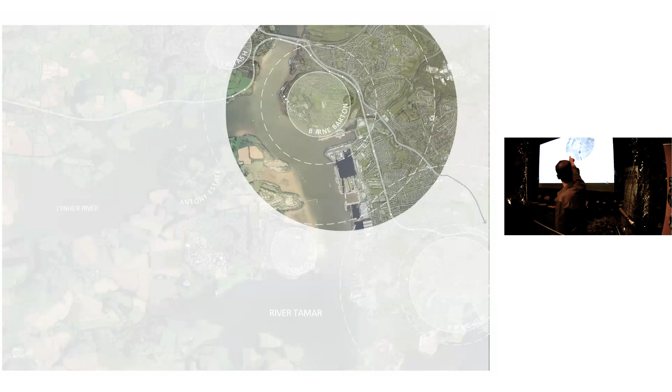As you can see from the map, it's a bit skewed, but it's 5 kilometres from the city centre where we are now. And actually, I haven't got a point to it, but we actually went on the boat last night. You can see, just for your reference, the Tamar Bridge, the Brunel Bridge at the top there.

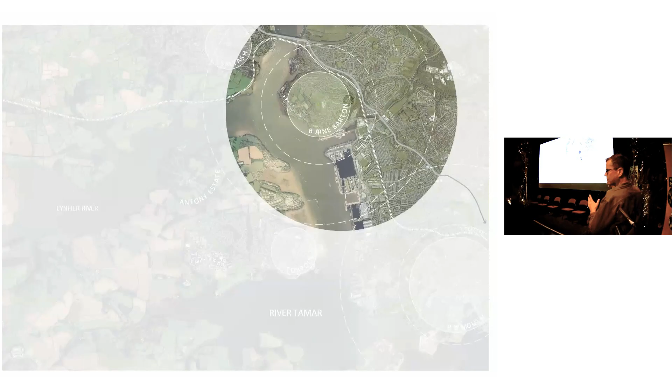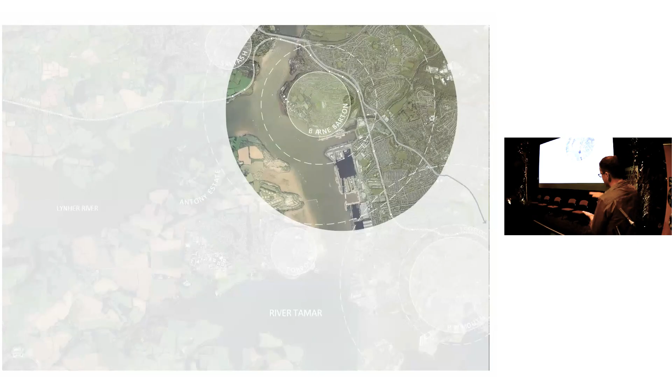So known locally as the island, it's surrounded by the dockyard to the south, the Tamar Estuary along the west, and then to the north and east is the railway line and road. So it's only accessible by one route, one road under a bridge, so it does feel very disconnected from the rest of the city and quite an isolated community.

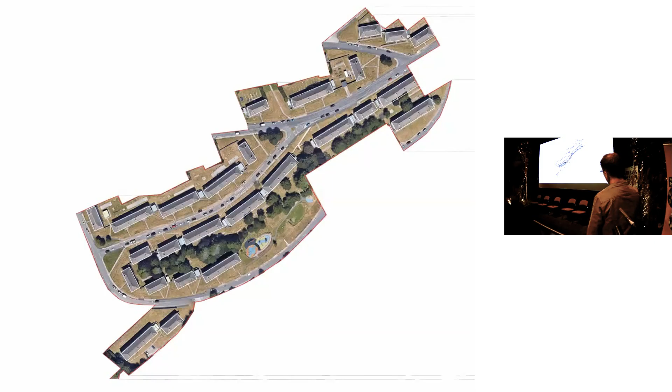One of the main challenges, as Paul was mentioning, was the topography of the site. There's 28 metres of level change from the top to the bottom, so it was great fun working out the levels on that one. As you can see, all the blocks are either set up or down from the roads, so many problems with accessibility, and some of the gradients are as steep as 1 in 4 across the site. That was quite challenging to work with.

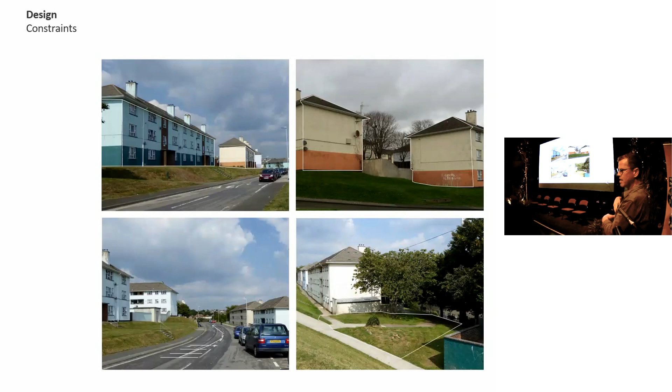As I was mentioning, each block is exactly the same, so it's quite hard to orientate yourself when you're moving around the site. There were no windows on gable ends, so it's not really good for natural surveillance, and there were lots of leftover parcels of land, and generally an unkempt estate, which had knock-on effects in terms of Secured by Design.

We chatted at a lot of consultation events, and families said they were scared to leave their flats at night because all this area in between the blocks had no natural surveillance at all, was heavily wooded, and had no definition between public and private, with a lot of associated issues.

Another thing that happened during the course of our project work down there was construction of the energy from waste building, which, being such a large building on your doorstep, had really big visual impacts, with the smoke and everything. That had some quite negative connotations as well for the local residents.

But it's not all bad. As Paul touched upon, the local community has been so strong throughout the whole process. We did 8 consultation events, and we had a newsletter, an arts project, and websites. But one of the best things is the resident steering group, set up in 2017, which has met every month since, giving over 800 hours to this project.

And the first residents are moving back in December. Out of the original cohort of 20 families, we've decanted into phase 2, which is still standing, and a lot of them are moving back in December. That's one of the really strong things we'd like to tell you about this project.

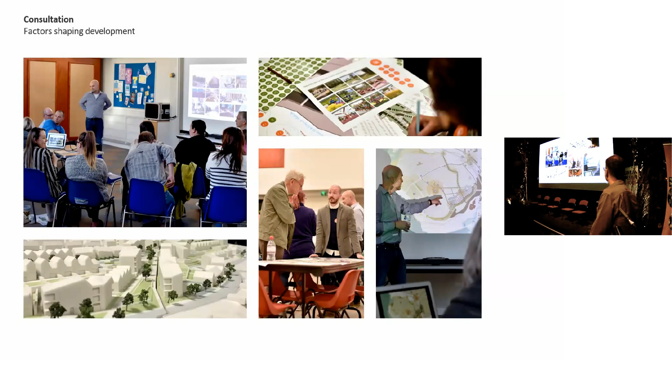The other thing is the River Tamar. I'm a little biased because I grew up a little upstream from there, but I don't know if you saw it on the boat trip yesterday, how beautiful it was. If you were walking around Barton, you wouldn't know it was there. We felt this is one of the most amazing rivers in the country, and bringing something of this quality into the site was our big opportunity.

As we touched on earlier, there's 228 two-bedroom apartments. What we're proposing is a mix of 2 and 3 bedroom homes and 1 and 2 bedroom apartments, so people can stay within the neighbourhood throughout their lives, upsizing and downsizing as they need.

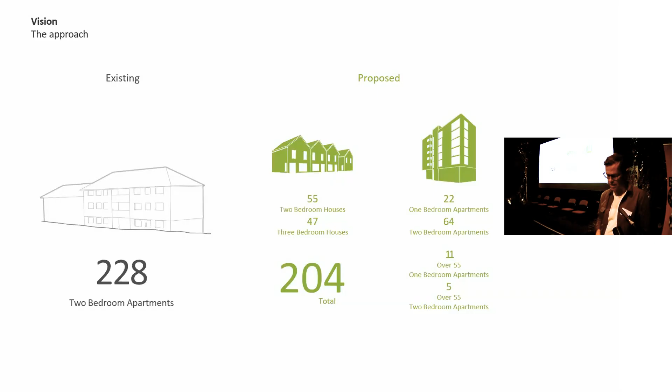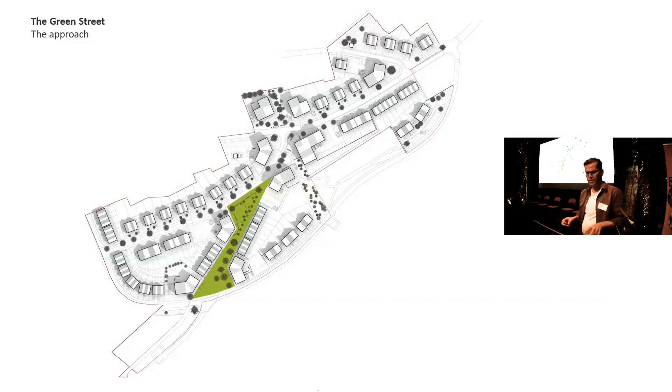From the existing condition, one big move was a green street. That reorientated the whole site away from the energy from waste building towards the River Tamar, trying to bring some of that beauty and quality into the heart of the site. It also cut across those levels, so from very steep streets we've now got a gentle gradient up to the heart of the site, reducing health inequalities for people who live there.

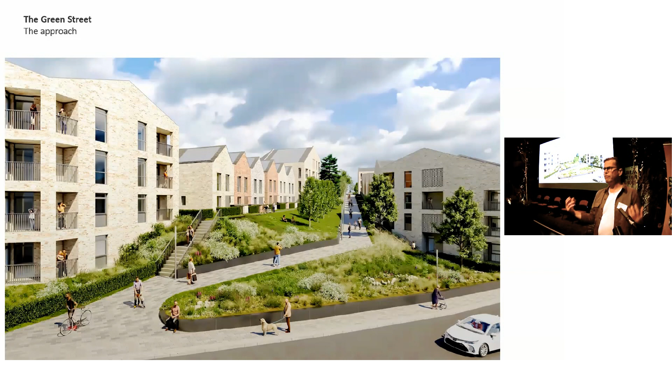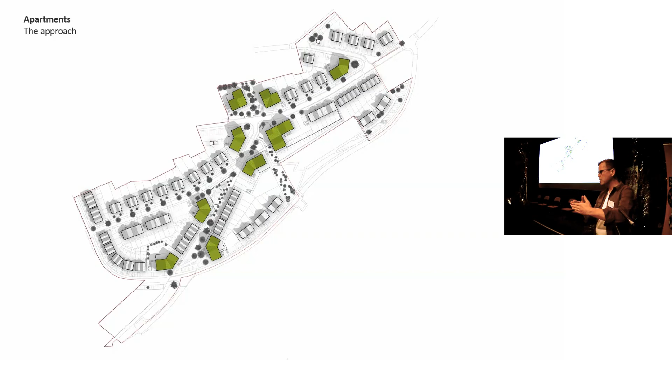Along the Green Street we've got lots of active frontage, a range of housing types, a lot of planting, rain gardens, informal play, and a focus for this new community. On the corners, to deal with the gradients as you go from one level to the next at 90 degrees, we use apartment blocks, giving a real focus and enclosure to those key nodes throughout the site.

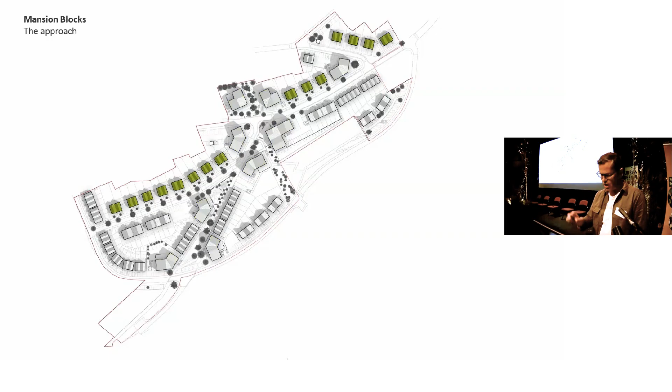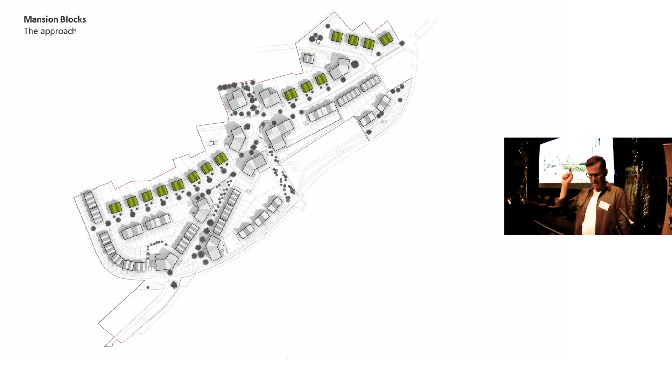Our next big move was mansion blocks. These worked well — there's a big level change from back to front, over 3 metres. They take up that change in level, providing an apartment on the ground floor and 2 houses above. These have proved popular with Clarion and residents because of multi-generational living — grandparents taking the flat downstairs and families above. They get a nice front garden for the apartment and big back gardens with amazing views out across to the Tamar.

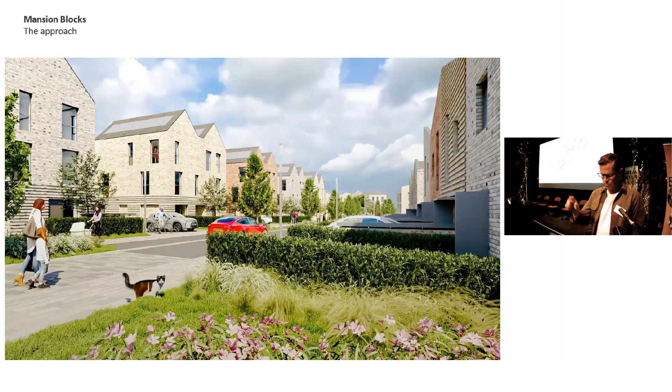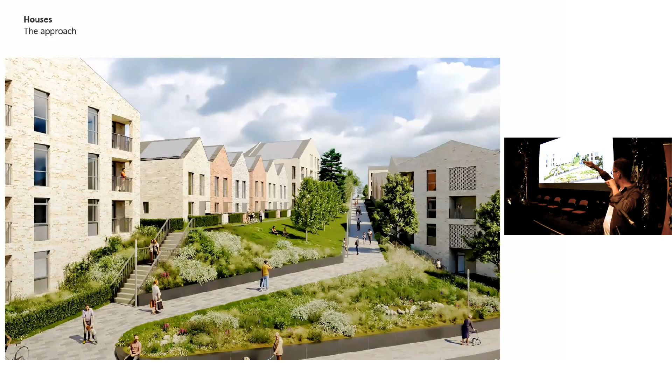We've infilled those streets with houses, ranging 2 and 3 bed houses, mainly terraces. The gable ends give that animation along the street, and they step up as you move up the green street to get that nice active street scene.

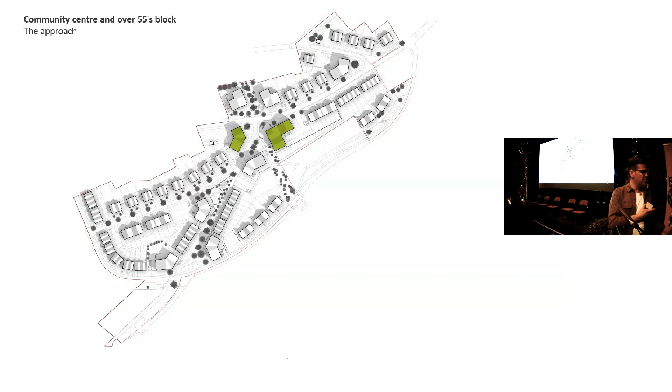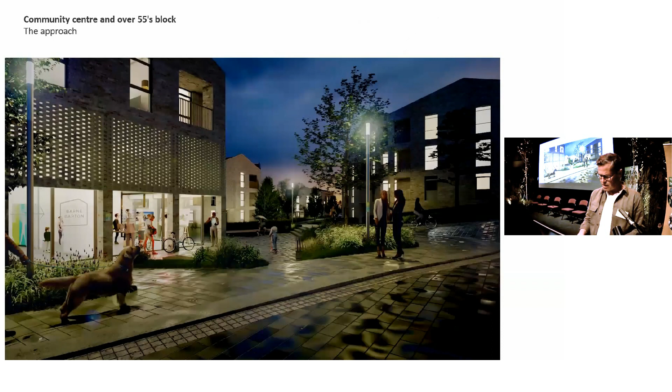At the central square we've placed the community centre, giving Clarion a permanent presence on site for events and ongoing consultation, plus an over-55s block, right at the heart of the site. So there's the master plan that gives you an idea of how it's all come together.

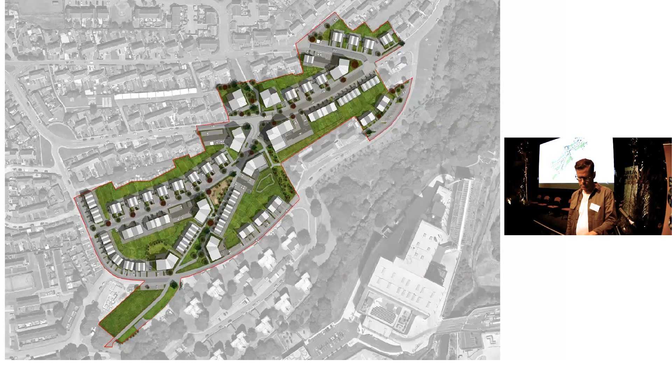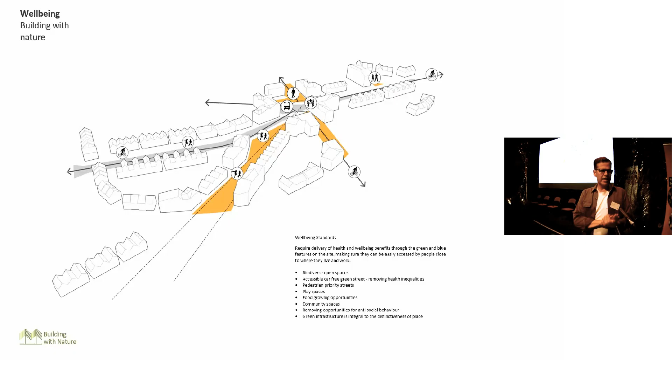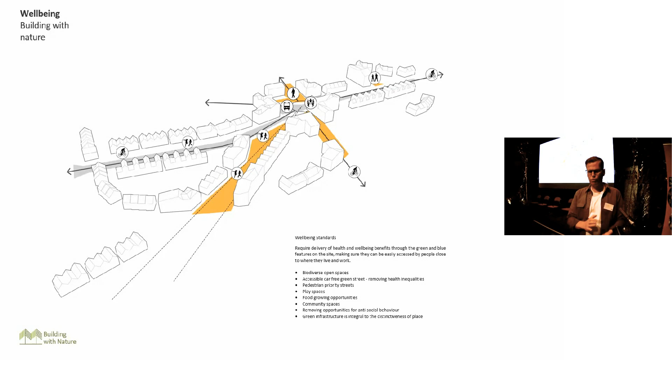So, Building with Nature — I think this is the first one, wasn't it, Clarion? We suggested it because we thought it is best practice for master planning, and it ticks all these building with nature boxes. In terms of well-being, we've got community uses, play on that green street, food growing, accessibility — it's doing well on all those aspects.

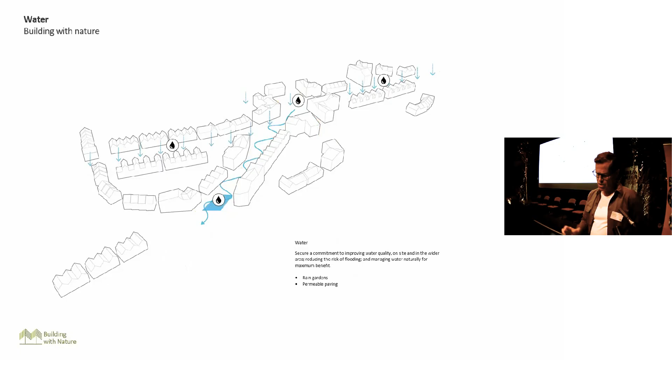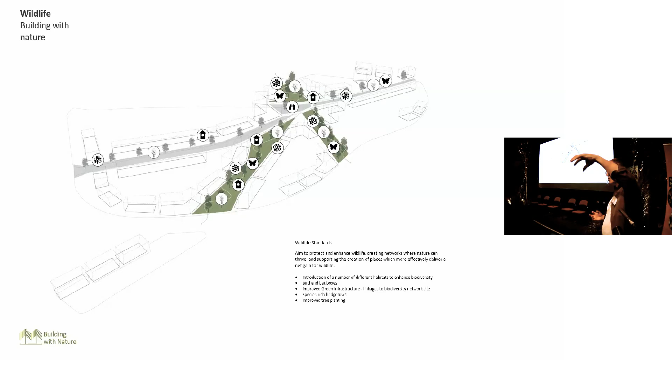On water, we're naturally draining the whole site down that green street, with rain gardens at the bottom. On wildlife, we're connecting to the wider green infrastructure down to the woods at the bottom of the site. There's a lot of green space at the top of the Barne, so we're connecting up to there and through this green street, which we think will be the first of maybe 2 or 3 phases getting down and out to the Tamar.

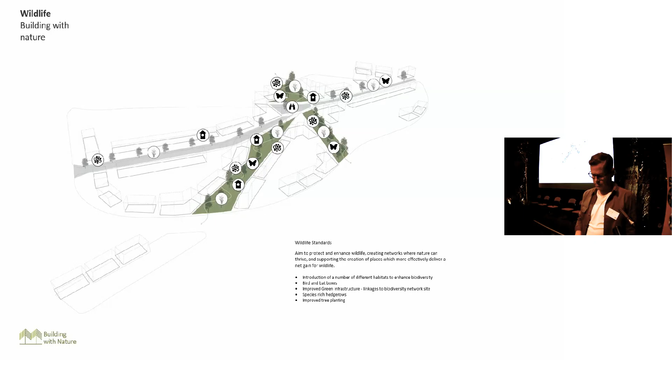I'm just going to pass over to Paul for the last couple of slides. We've learned a lot in terms of building with nature from the Barton site. We're now looking to apply it to as many of our sites as possible, and we're probably going to include it in our employers' requirements.

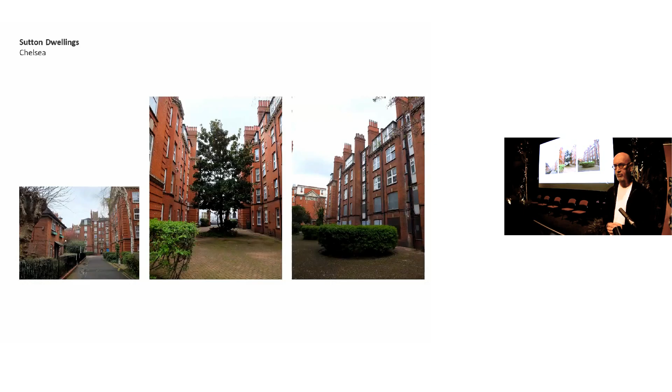This is the next site where we've used building with nature as our benchmark — a very different site, in Chelsea. This is a 1913 mansion block based estate, a little oasis of social housing in a sea of the most expensive real estate in Europe. We've just completed phase 1 — we got handover on Tuesday, did an open house last weekend, and there are a couple of community events on there as we speak.

As you can see, this is a very harsh environment — very hard, with very little greenery, and what little greenery there is, laurels and other stuff you wouldn't want. What we've done with this site is completely soften it up, starting to include things like balconies that weren't there before. But really the landscape is the key here.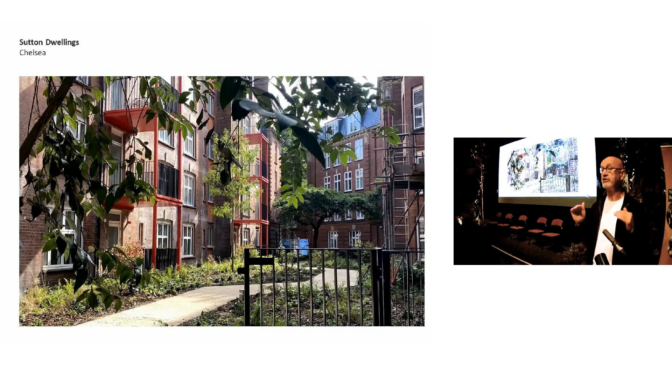So this is the way we're hopefully going to run a lot of our regeneration projects in future. Building with nature is a great starting point — it's pass-fail, so if you commit to it you have to deliver against it, and you're tested against it. We think it's a great way of building that future biodiversity into your schemes. Thank you. Lovely, thank you.